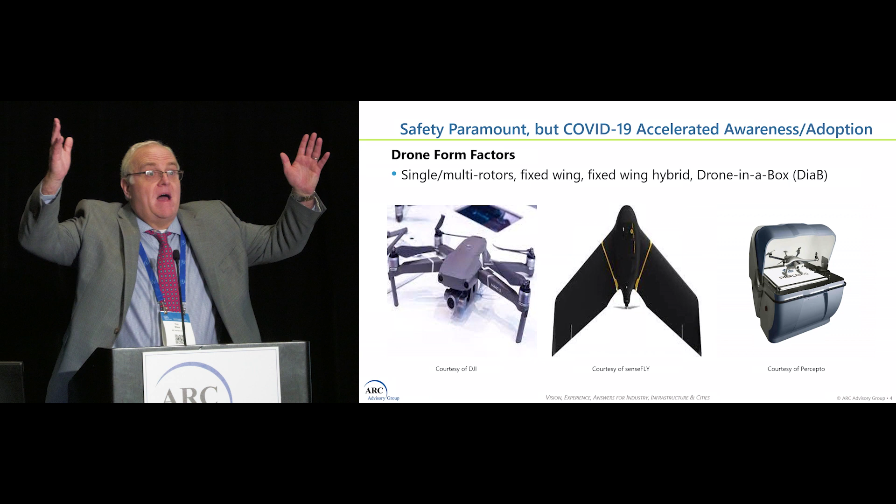Since the focus here is on drones, these are examples of the different types. You've got the predominant share of the market, based on our research, which is the multi-rotor type drone on the left. Then you've got the fixed-wing one in the middle, and a growing area of interest is these drone-in-a-box solutions, operated autonomously. You see the enclosure - it's usually weather-proof with a charging setup inside and communications capabilities. It opens up, the drone flies a pre-programmed mission, returns, and most can self-charge and prepare for the next mission.

I think that's going to be a real growth area, because with advancements in autonomous technologies that may be used for vehicles or whatnot, we're going to see a lot of activity. The drone is really becoming a mobile inspection platform - same with robotics, because you're adding in intelligence analytics, whether edge or cloud computing or both. That's where I think the future is going to be.

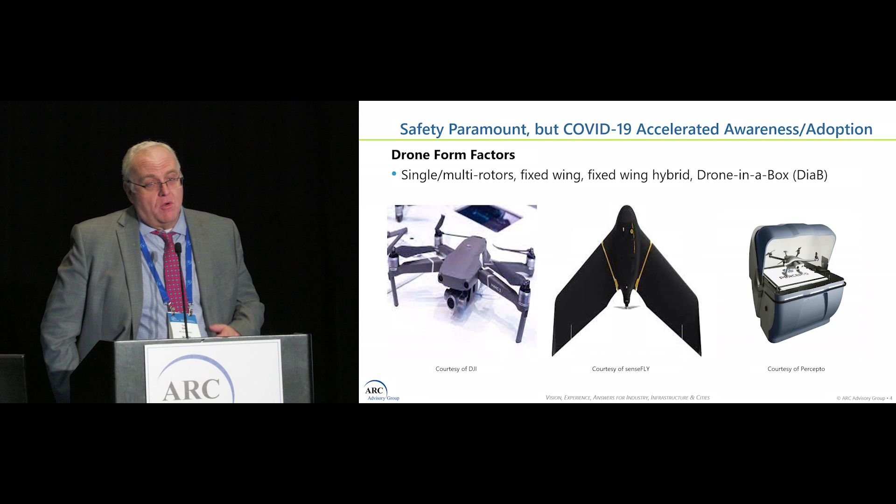In many cases the drone will be perhaps an advisor, but with the great crew change going on in various process industries, if companies are challenged to find personnel, these technologies will be able to replace them. But the number one driver is safety - not having someone go into a nuclear power plant, an electrified substation area, or climb a 300-foot flare stack. Those are the applications we see in remote locations and emergency response for electric power providers. COVID, as we know, accelerated this push towards remote operations, and increasingly companies are looking at autonomous operations, where drones and robotics will play a role.

Applications, as I mentioned, it's the kind of hard-to-reach or dangerous type applications that are the initial drivers of people investing in drones and also robotics. But some of the major applications you'll see are inspections.

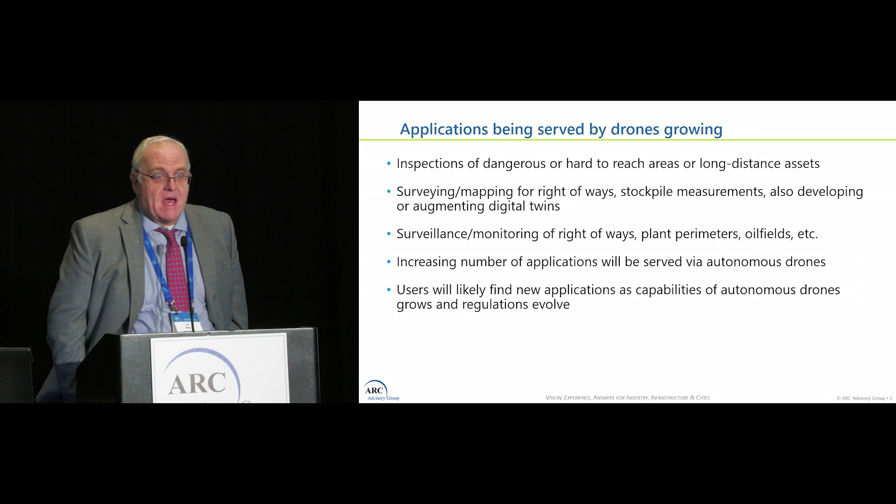It could be thermal inspections on a utility line or something like that. It could be surveying, mapping, inspections of going around perhaps a refinery or an offshore platform, doing various inspections. Those are some of the key applications we're going to see. Stockpile measurement in mining and things like that.

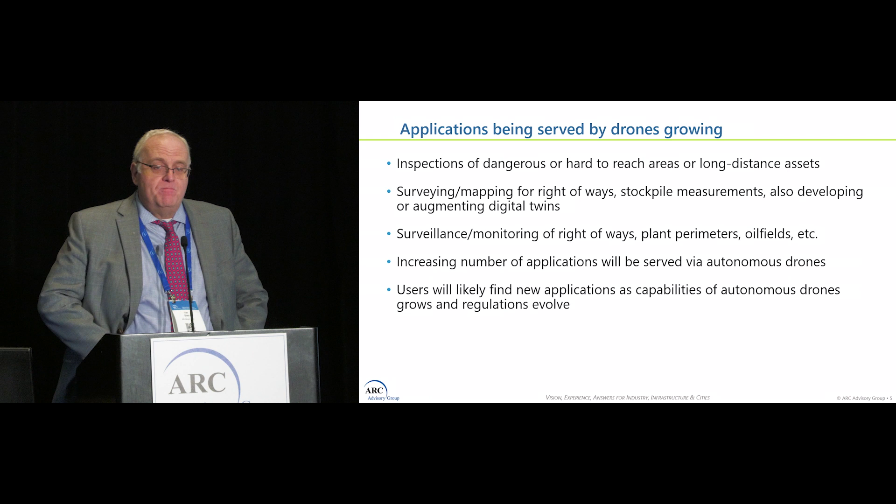And obviously using these tools to develop things like digital twins. I think you can go out and use these drones to create a digital twin of an offshore platform or whatever the case may be. And I think that's going to be an area where we're going to see a lot of interest and demand for that type of technology.

And I think as the adoption increases, the two major hindrances of greater adoption are battery technology primarily, and regulatory aspects that the FAA and other countries have with their own respective aviation regulatory aspects. And that's something we're seeing some progress with the FAA.

They kind of move slower than most people would like, but they're moving, with companies trying to push for type certifications. If you're familiar with the drone situation, you've got visual line of sight, where you always have to be in visual contact with the drone. You may have to have spotters, either on the ground or in planes, or beyond visual line of sight, where you can fly beyond the visual line of sight.

But you can only fly at certain altitudes, and in many cases you have to have an observer or things like that. So those BVLOS waivers that you apply for—say if the FAA receives 100, my understanding is they've approved less than 4%. And most of those are for utilities used for emergency response.

And I think BP was an early adopter. They got approval to use these on the North Slope—of course there's no one there but moose and bears, so there's not a real threat of these things crashing into human beings, which is one of the concerns the FAA has with various regulations around flying at night or flying over people. So they're working together with the suppliers to advance these regulations.

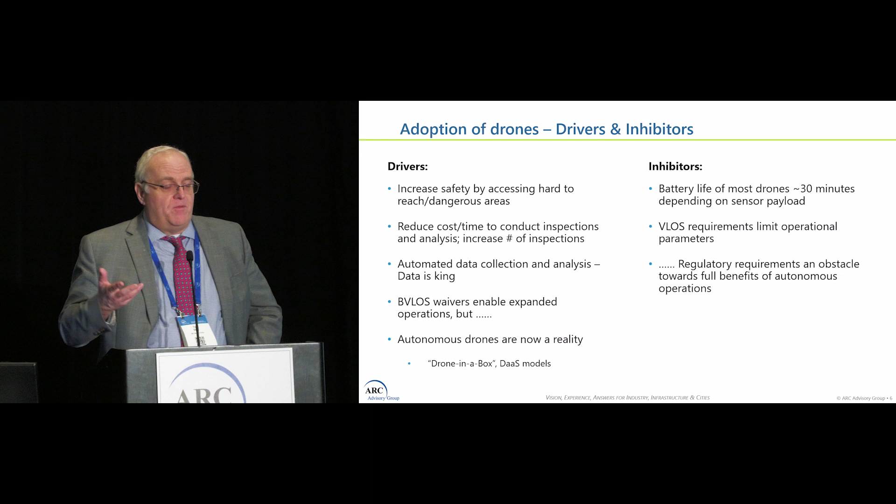So the ability to have these drones and robots go around and consistently do the same programmed route over and over again, you get good data quality and good data consistency. And if you add in the ability for analytics and things like that, you start to get the ability to do more automated reporting. So it opens up a lot of potential opportunities.

I talked a little bit about the BVLOS waivers—if you're only getting 4% of those, it makes it a little bit harder to get a lot of these missions flown. And I talked about the battery life, but I think there are some things happening in that area that hopefully will have a positive impact.

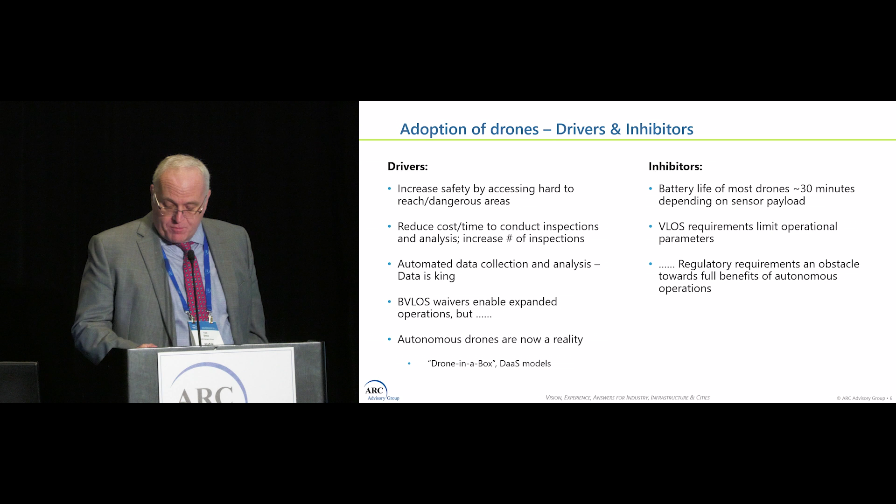Obviously, when we did our research, we tend to be a little bit more conservative. I've seen a lot of these different studies about how the drone market is so big and growing so fast. And I start talking to these guys, and they say, well, where are all these drones? Because I know there's only so many refineries across the world, and then you find out that a lot of these numbers are highly inflated. So when you get down to it, my belief is that there is a drone market out there today. It's a lot smaller than people think, but I think there's room for opportunity.

And I think that's going to be a reflection primarily of less restrictive requirements from the FAA and other organizations like that, to open up that envelope and allow greater mission capabilities. And I think there's a trend toward this great crew change—you've got a lot of folks with gray heads and a lot of domain experience who are retiring, and the challenge of trying to recruit with the younger generation. So I think these drones can help fill that gap that companies may have in that area.

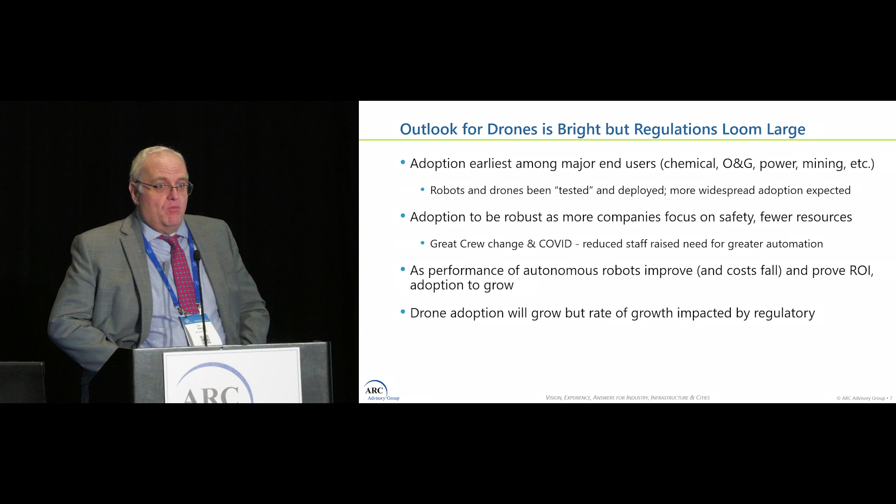So I expect to see them becoming, initially, a mobile inspection tool that in many cases helps advise some of the employees, but at some point down the road they may actually help fill in and mitigate the need to have a whole crew of people. Maybe instead of sending a crew of five, you can send only one or two, and have the drone do most of the heavy lifting in terms of data collection and things like that. So I think that'll help with resource allocation. And I talk a little bit about robots because I do think there's a bit of synergy in many cases.

In fact, AeroVironment, which was a military-focused company that did drones and things like that, last year acquired a company called Telerob in Europe. That company focused on tracked robots with a little appendage, an arm or something like that—used for IED inspection, law enforcement type applications, but there are industrial applications they can serve as well. So I think they saw that you have the drone for a broader aerial perspective, and then the robot to go in and do some of the more tactical stuff when you have to get up close, in cases where a drone may not be able to handle that application. So that's a potentiality I think will happen.

Obviously, we talked about the key of inspections and leak detection—I think that'll be a pretty sizable application, more for the fixed-wing type drones because they can fly longer distances. And I think surveying and mapping and creating digital twins, there are certainly some applications there too.

In terms of the robots, Boston Dynamics was now incorporating a movable arm, showing videos of the robot being able to open, theoretically, a door handle and things like that. I think as that technology on the actuator side improves, you'll start to see more applications opening up.

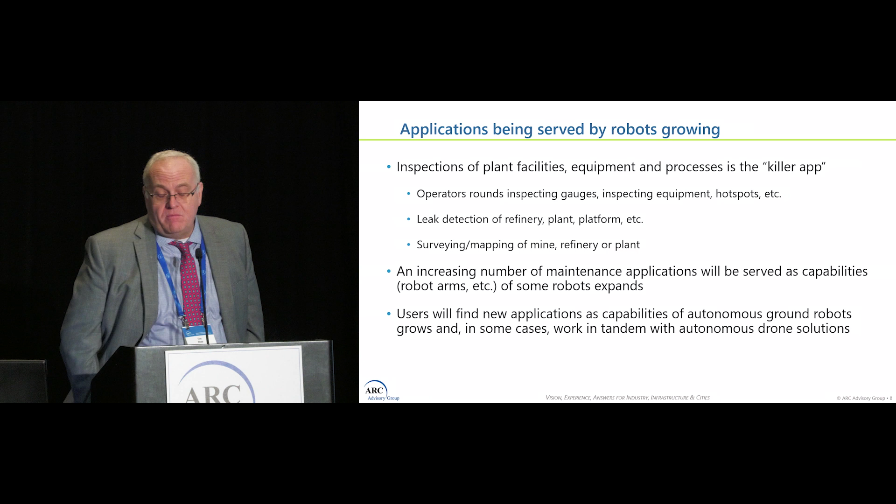And again, as these robots are tested on offshore platforms in various parts of the world, or other applications, and those are proven out, I would imagine the companies would probably look for additional areas or applications where these drones and robots could be deployed.

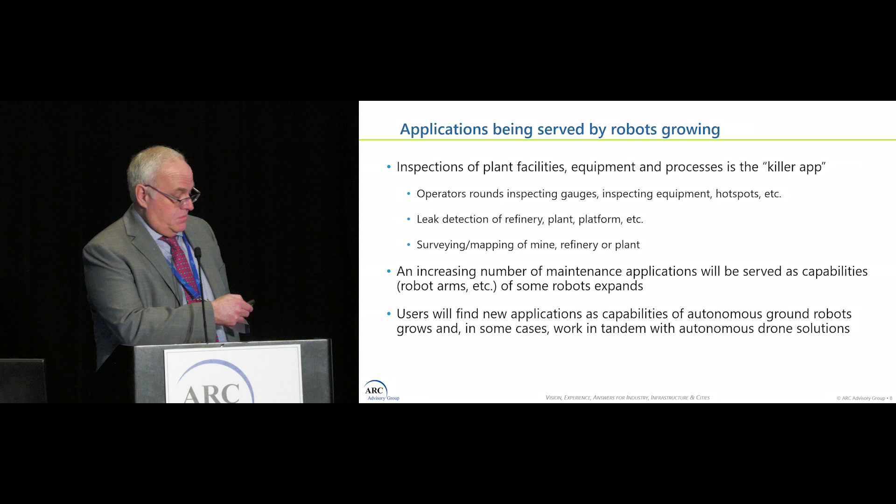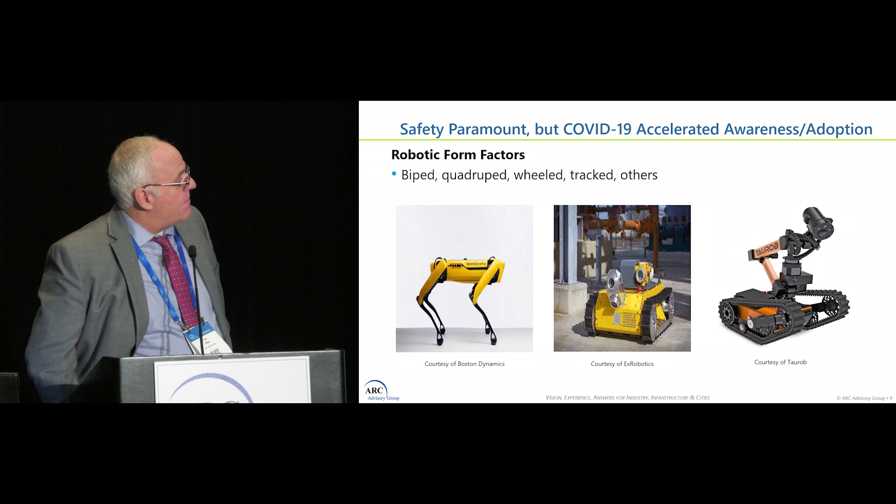So, a bit more about Boston Dynamics. There are a couple of companies with a similar quadrupedal look - Anybotics out of Switzerland, Unitree in China, and Ghost Robotics, which is actually being sued by Boston Dynamics right now for possible technology infringement. There are also wheeled or track type devices - there's a company called SMP Robotics with four wheels that kind of fly around. They do a lot of physical perimeter security applications, leak detection, and similar tasks. Those are various types of applications. I haven't shown the ones that crawl inside a pipe or on the side of a tank - those are other applications for these devices.

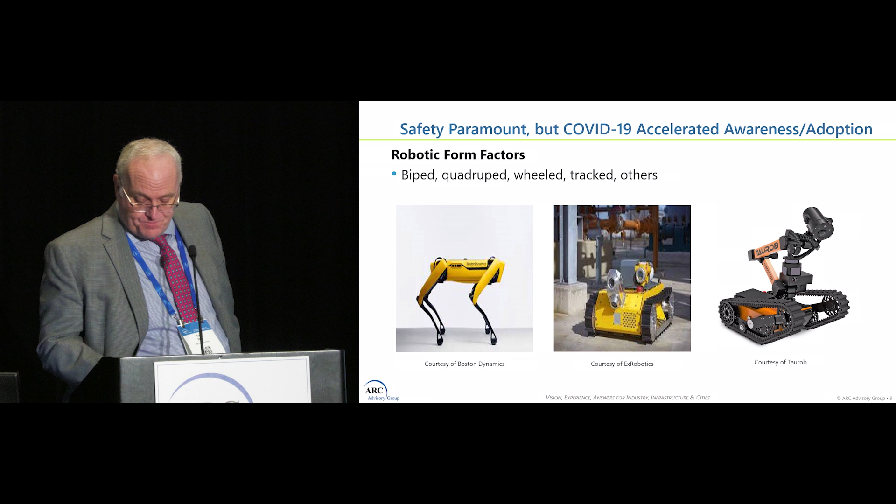A lot of the same drivers are found with robotics as with drones. Safety is really the number one driver. You also get the ability to do routine, over and over inspections, so you get good data consistency and data quality.

The autonomous aspect is interesting - when you talk to the robot guys, they'll say 'oh, our robot's autonomous,' but it's really a guy 10 feet away with a joystick directing the robot. So they've been working with some of the drone guys, taking technology from the vehicle side, making it much more autonomous with detect-and-avoid technologies and things like that, where the robot can really be more autonomous, like we're seeing in drones. That technology sharing is going to go a long way toward helping generate adoption.

Looking at Boston Dynamics, even without any payload, the enterprise version is at least $150,000. If you start throwing sensors on top of that, you're talking $250,000. Unless it's really a critical safety requirement, like for a nuclear power plant or a highly electrified substation, a lot of companies are hesitant to have the robot go around at that price point to do dials and inspections. So I think they're all working to drive the price down, which will certainly help with adoption.

Obviously, like drones, these robots can operate for about 2 hours, plus or minus, and then have to come back to base and recharge themselves. So that's obviously a technology inhibitor in a way.

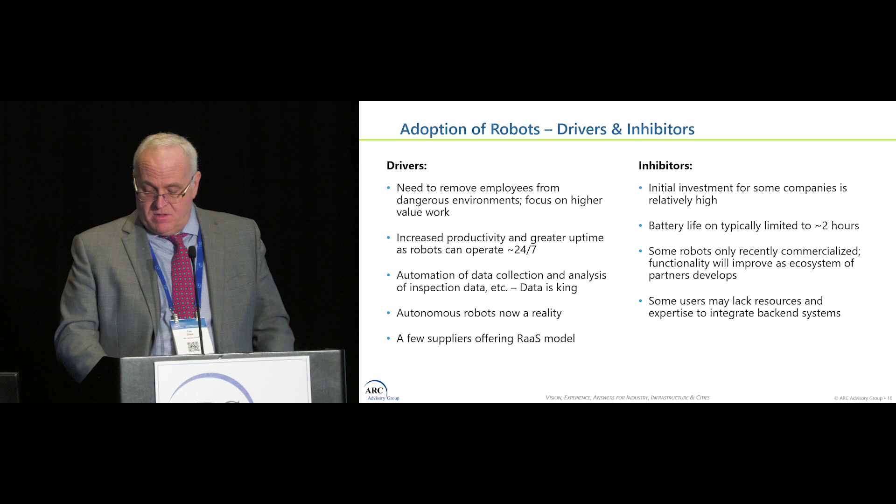I think we'll see more commercialization. Again, we're talking about the ecosystem, and as that continues to develop and they add new functionality, I think that's going to help generate more demand.

Looking at both drones and robots, it's like anything else we see at ARC - it's really the challenge for a lot of companies that don't have internal domain expertise. They need technology partners to help them, whether that's setting up and integrating the robot and drones into their maintenance systems, or getting all that data integrated properly.

Some companies are out there right now providing robot-as-a-service, drone-as-a-service, or drone inspections. They'll usually use a DJI or some other type of drone, bring their pilots and inspectors, and provide a service to certain companies, obviously for a fee. So we're seeing some of that market there.

But I think the last point I want to make is that, as with anything new, if you haven't really looked at your autonomous roadmap - whether you're an oil and gas company, a chemical provider, or something like that - you need to look at where you see drones and robots coming on. I always say think big, but start small. Try to lay out the applications where you think there could be real value. Anything that's dangerous or routine for a robot - dirty, dull, and dangerous is the 3 Ds in this space, and you hear that often.

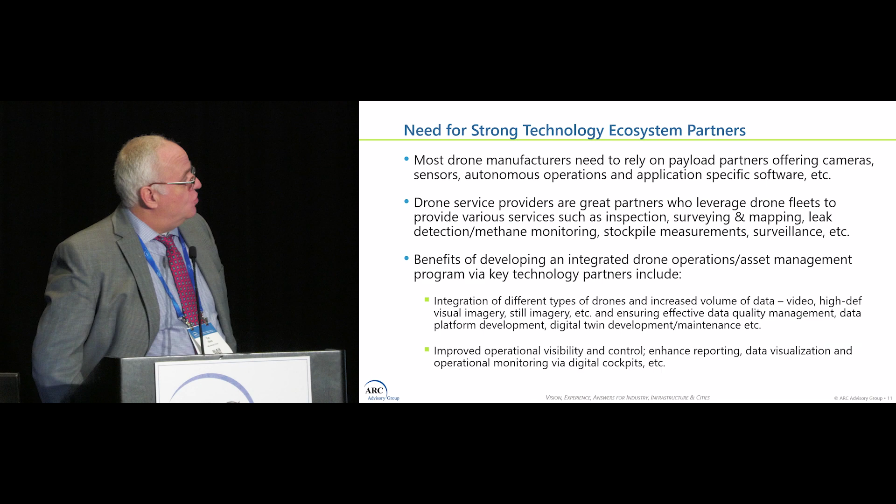So I encourage you to listen to the folks presenting here and look at their challenges and any successes they had, and we certainly welcome your questions during the panel discussion. So thank you.